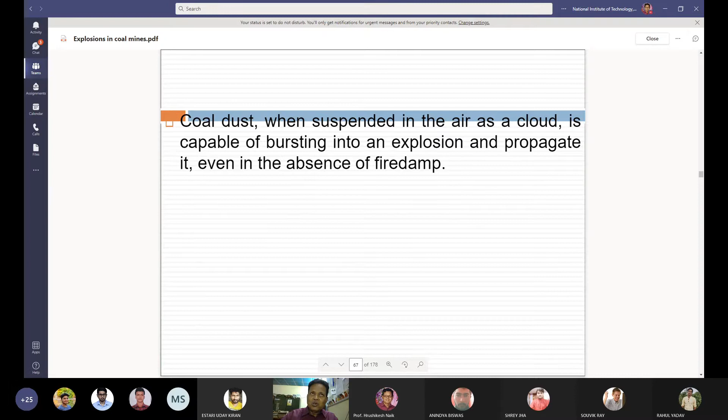So what is coal dust explosion? Coal dust, when suspended in the mine air as a cloud, is capable of bursting into an explosion and can propagate very fast even in the absence of fire damp. That is called a coal dust explosion.

For a coal dust explosion to take place, the following conditions should be present in the mines. First, the coal dust must be of a composition which includes sufficient volatile matter.

Second, the coal dust should be of necessary fineness for the explosion to take place, and it should be in a dispersible condition in the form of a thick cloud, so dense that one cannot see through it. The quantity amounts to 30 to 40 grams per cubic meter of the mining space.

Another condition is that a source of ignition of sufficient intensity should be present for the coal dust explosion to take place. If these conditions are fulfilled, the coal dust explosion is going to occur. Such circumstances generally exist after a fire damp explosion, and for this reason the coal dust explosion may take place.

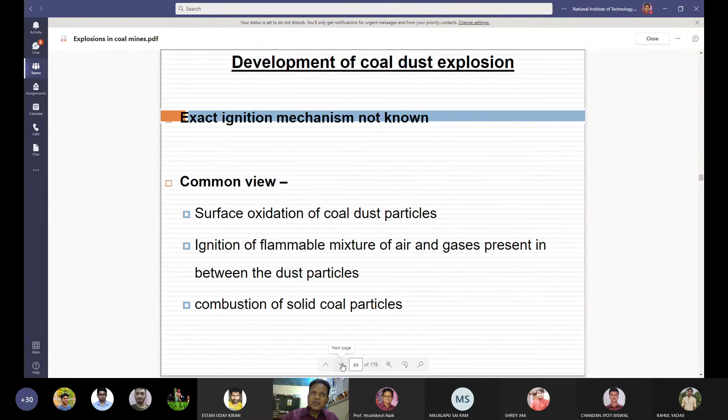This coal dust explosion develops in stages. The first stage of ignition is called 'puff'. It is a sudden combustion process of a part or whole of the airborne dust, marked by a very high temperature but without any dynamic effects.

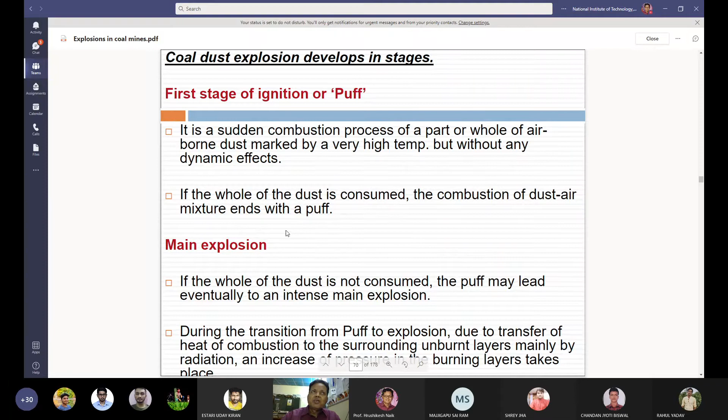It is a sudden combustion process of a part or whole of the airborne dust, marked by a very high temperature but without any dynamic effects. If the whole of the dust is consumed, the combustion of the dust-air mixture ends with a puff. But if the whole of the dust is not consumed, the puff may lead eventually to an intense main explosion.

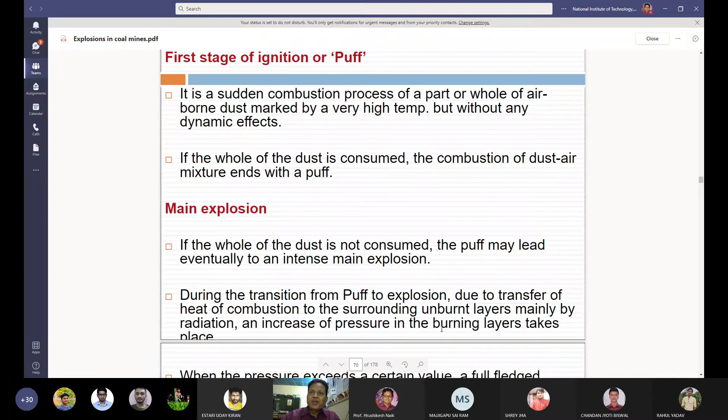During the transition from puff to explosion, due to transfer of heat of combustion to the surrounding unburnt layers, mainly by radiation, an increase of pressure in the burning layers takes place. When the pressure exceeds a certain value, a full-fledged explosion develops in which combustion takes place at a rapid rate. The pressure wave passes through the unburnt layers ahead of the explosion flame and stirs up the deposited dust, creating the necessary fuel in the form of a thick cloud for the following flame.

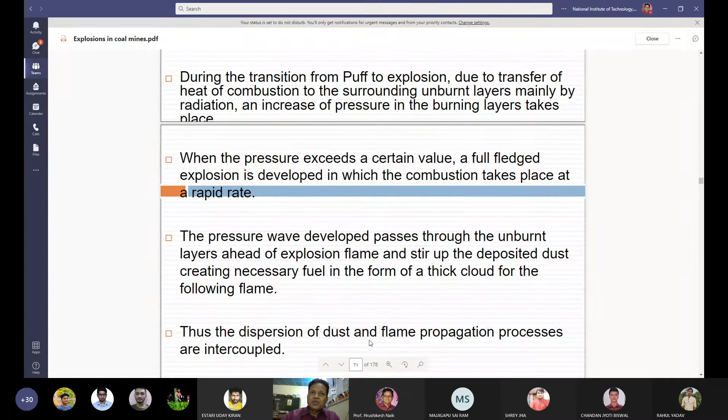Thus, the dispersion of dust and flame propagation processes are intercoupled.

Second, we are going to discuss flammability or explosive limit of coal dust. Just like methane gas explosion, flammability limits are there - lower flammable limit, upper flammable limit. Similarly, for coal dust, there are flammability or explosive limits. So what is flammability limit or explosive limit of coal dust? It is defined as its ability, when in the form of a cloud, to spread or propagate ignition to all points where dust-air mixtures of corresponding concentration are present.

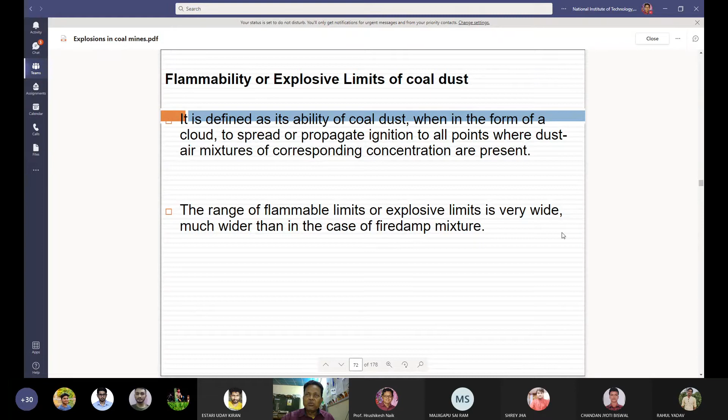The range of flammable limits or explosive limits is very wide, much wider than in the case of firedamp mixture. So the lower flammability limit is not an absolute quantity. It depends upon the particle size of the coal dust, chemical composition of the coal dust, nature and intensity of the igniting source, time of contact with the igniting source, turbulence of the coal dust cloud, uniformity of dust dispersion in the medium, purity of the sample, composition of the atmosphere, composition of the mine atmosphere, especially methane and oxygen contents in the mine atmosphere. These are the factors which influence the lower limit of flammability of coal dust.

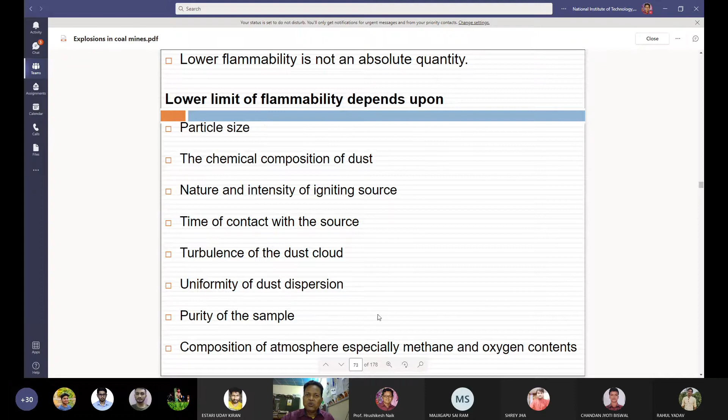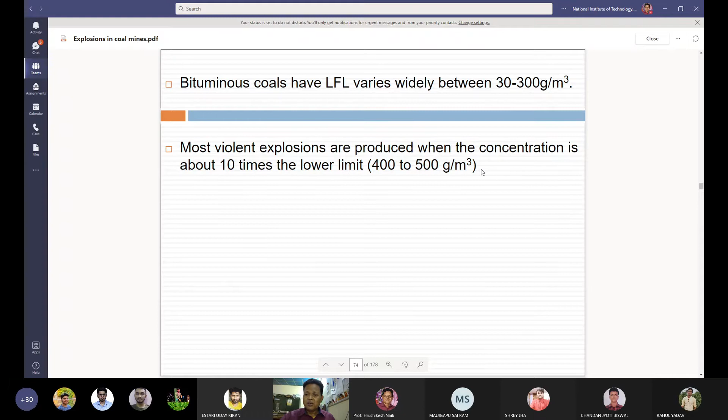Bituminous coals have a lower flammability limit which varies widely between 30 gram per cubic meter to 300 gram per cubic meter. Most violent explosions are produced when the concentration is about 10 times the lower limit, that is 400 to 500 gram per cubic meter.

Then, what is ignition of coal dust air mixture? Ignition of coal dust air mixture is not as rapid as with gas air mixture. A larger source of heat is required for the coal dust air mixture to explode.

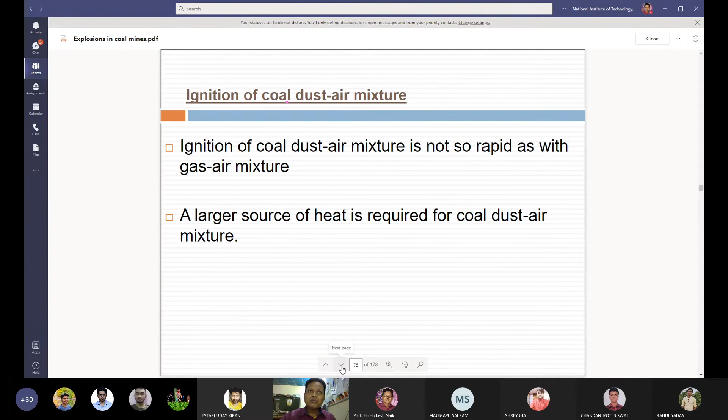The ignition temperature of coal dust cloud depends on the rank of the coal. The ignition temperature decreases as the rank of coal decreases from anthracite to subbituminous coal. So ignition temperature of coal dust depends upon the rank of the coal, and the nature and intensity of ignition source. It varies between 900 degrees centigrade and 600 degrees centigrade for relatively low ash coals.

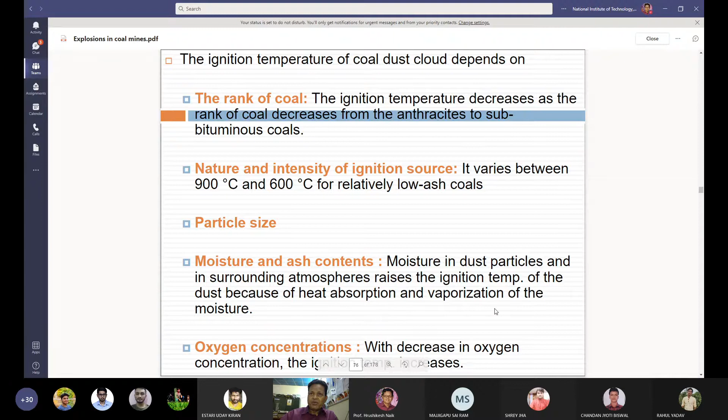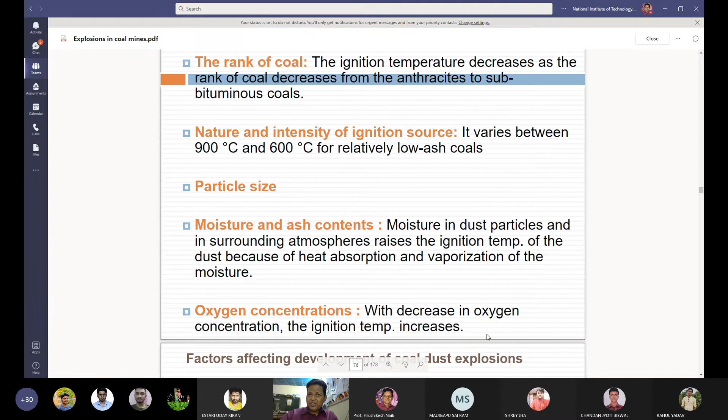Also, the ignition temperature depends on the particle size of the coal dust. It also depends on the moisture content and ash content. Moisture in dust particles and in the surrounding atmosphere raises the ignition temperature of the dust because of heat absorption and vaporization of the moisture. The ignition temperature of coal dust also depends on the oxygen concentration in the mine atmosphere - with a decrease in oxygen concentration, the ignition temperature increases.

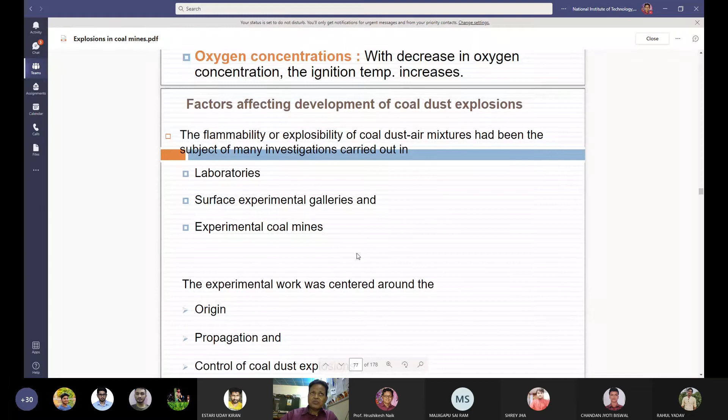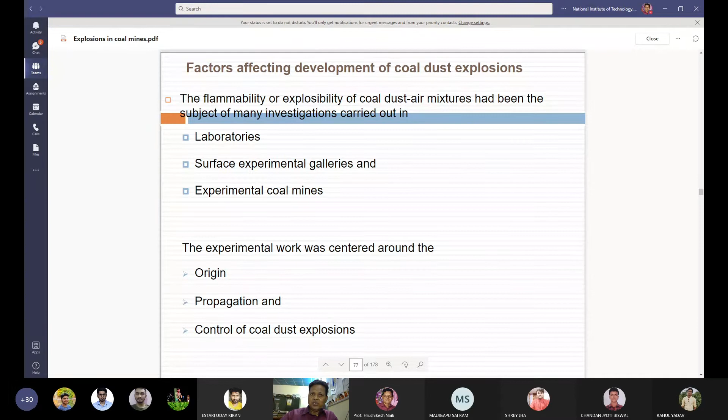Then there are certain factors which affect development of coal dust explosion. The flammability or explosibility of coal dust air mixtures had been the subject of many investigations carried out in the laboratories, surface experimental galleries, and experimental coal mines. The experimental work was centered around the origin, propagation, and control of coal dust explosion.

The following are the factors which affect the flammability or explosibility of coal dust air mixture: particle size of the coal dust, dustiness of mine workings, volatile matter content in the coal dust, percentage of ash in the coal dust, percentage of moisture in the coal dust, oxygen concentration in the mine atmosphere, nature and intensity of ignition source, presence of firedamp in the mine air, turbulence of the coal dust particles, and surrounding conditions.

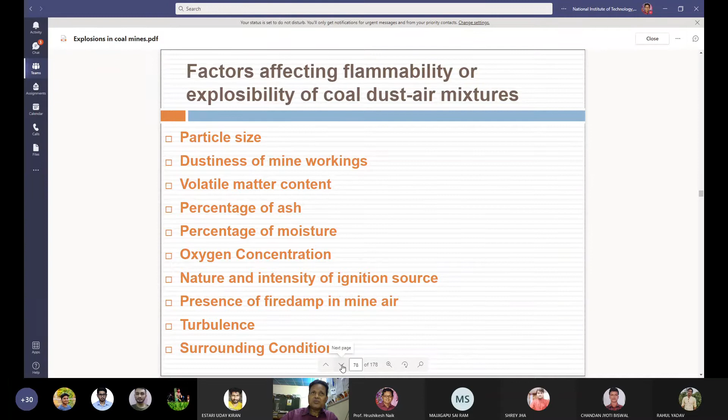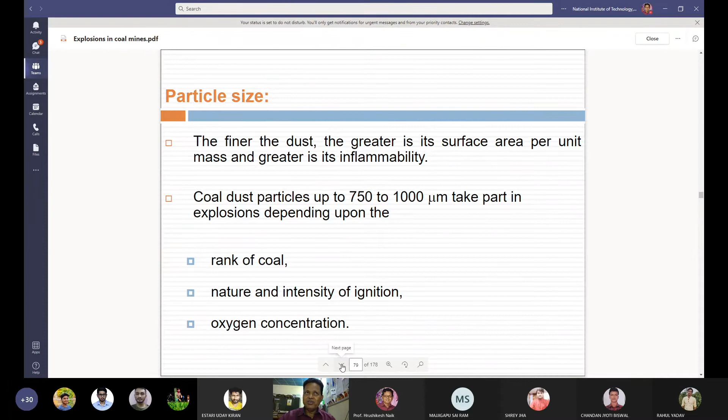What is particle size? The finer the dust particles, the greater is its surface area per unit mass, and the greater is its flammability. Coal dust particles up to 750 to 1000 micrometer take part in explosions depending upon the rank of the coal, nature and intensity of the ignition, and oxygen concentration of the mine atmosphere. The most dangerous particle size lies between 10 to 100 micrometer - if the coal dust particle size lies in this range, it is very dangerous.

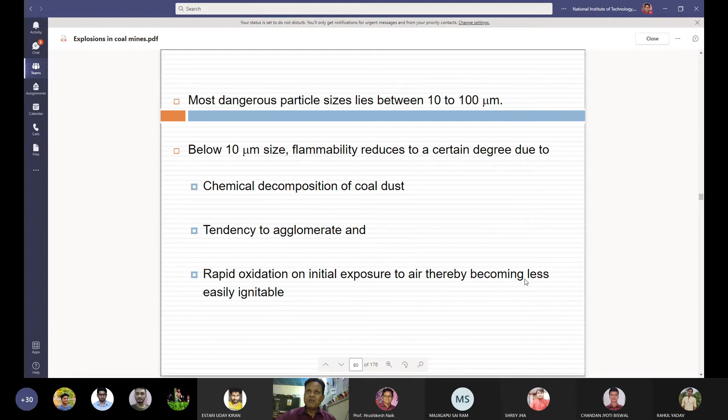Below 10 micron size, flammability of coal dust particles reduces to a certain degree due to chemical decomposition of the coal dust, tendency to agglomerate, and rapid oxidation on initial exposure to air, thereby becoming less easily ignitable. If the particle size lies between 10 micrometer to 100 micrometer, then it is very dangerous.

What do you mean by dustiness of mine workings? If the mine atmosphere is very dusty, it is called dustiness of mine workings. The dust cloud must be dense immediately surrounding the ignition source so that one cannot see through it. You cannot see anything if there is a cloudy dust there.

Minimum density of dust cloud which will propagate an explosion depends upon factors like the nature of the ignition source, fineness of the dust particles, and rank of the coal you are going to mine. A mine working is dangerously dusty if it contains 100 to 120 gram of dust per cubic meter of mine atmosphere, and most violent explosions occur at 300 to 400 gram per cubic meter.

The thermal ignitability curve for a coal dust, showing the relationship between ignition temperature and coal dust concentration, shows that the minimum value of the ignition temperature approaches asymptotically at higher dust concentrations.

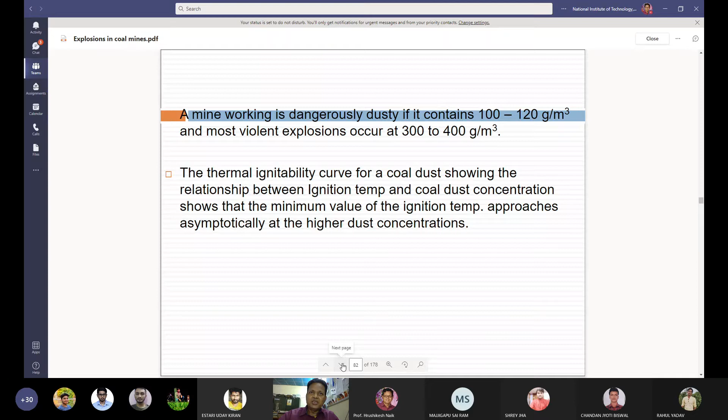How to calculate the volatile matter content in the coal dust? Flammability increases with increasing combustible volatile content. The volatile matter is usually calculated on a dry, ash-free basis by the formula: percentage of volatile matter in coal dust equals percentage of volatile matter from laboratory analysis into 100, divided by 100 minus percentage of ash minus percentage of moisture.

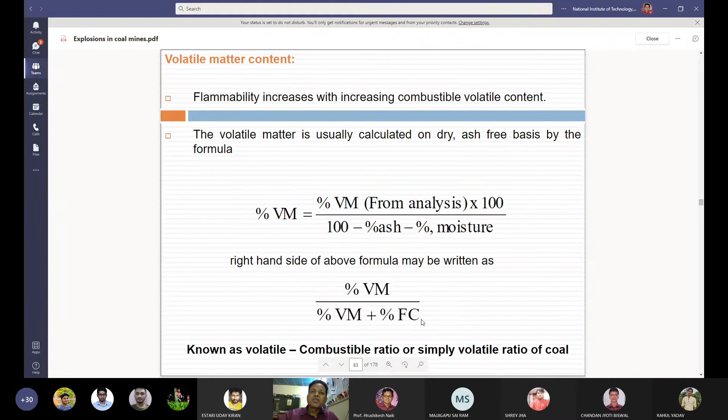The right hand side of the above formula may be written as percentage of volatile matter divided by percentage of volatile matter plus percentage of fixed carbon (FC), which is known as the volatile combustible ratio, or simply volatile ratio of coal. Volatile ratio of coal equals percentage of volatile matter divided by percentage of volatile matter plus percentage of fixed carbon in the coal dust.

Several investigations have shown that coal dust with volatile matter less than 10% is non-inflammable, not dangerous, and will not catch fire. If volatile matter lies between 10 to 14%, it is less inflammable. If volatile matter in the coal dust is more than 14%, it is highly inflammable - the coal dust particle is very, very highly inflammable.

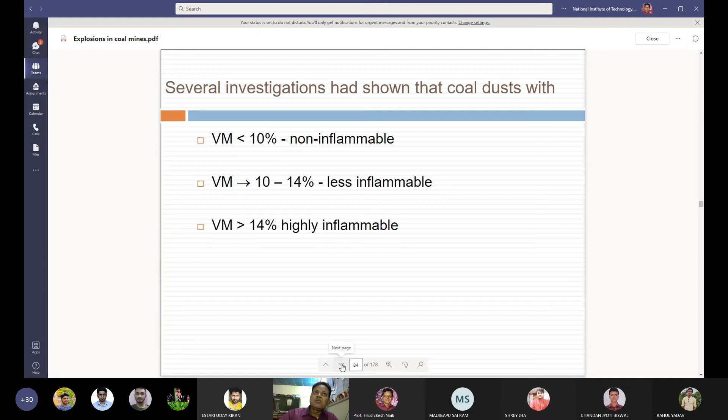What do you mean by percentage of ash in coal particles? Increase in ash content or presence of inert foreign material reduces the ignitability or flammability of coal dust because of heat absorption. If percentage of ash is more, the ignitability and flammability of coal dust will reduce. Stone dusting in coal mines functions on this principle, which is a practical application of the use of inert dust to prevent an explosion from taking place.

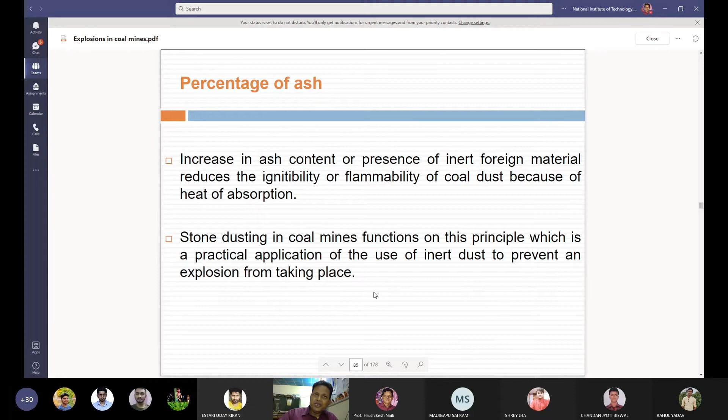Percentage of moisture in coal dust: moisture in dust particles raises the ignition temperature of the dust particles. It exerts a cooling effect because heat is absorbed during heating and vaporization, thereby reducing the energy available for ignition of the coal dust cloud. Coal dust containing 25 to 30% moisture content tends to wet and agglomerate the fine particles and reduces their dispersibility. If the coal dust is not dispersible, it is less liable to explosion.

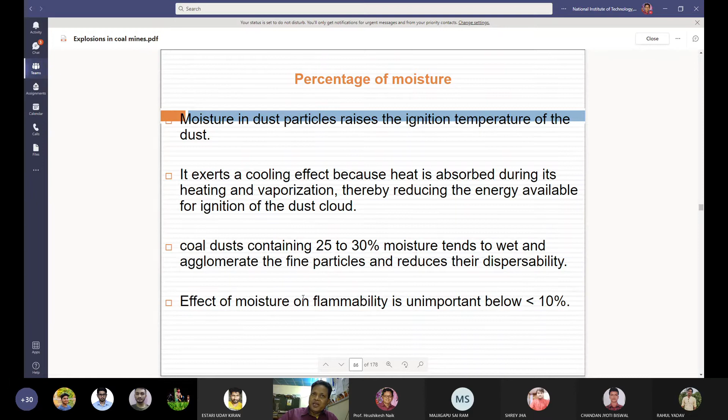Effect of moisture on flammability is unimportant below 10% - if moisture content is less than 10%, it is not going to affect the flammability of the coal dust particles. Then, oxygen concentration in the mine atmosphere: variation in oxygen concentration affects the ease of ignition of dust clouds and the explosion pressure.

With decrease in oxygen concentration, the ignition energy required increases, ignition temperature increases, and maximum explosion pressure decreases. This is the oxygen concentration in the mine atmosphere which influences the coal dust explosion. Variation in oxygen concentration affects the ease of ignition of coal dust clouds and the explosion pressure. With decrease in oxygen concentration, the ignition energy required increases, ignition temperature increases, and maximum explosion pressure decreases.

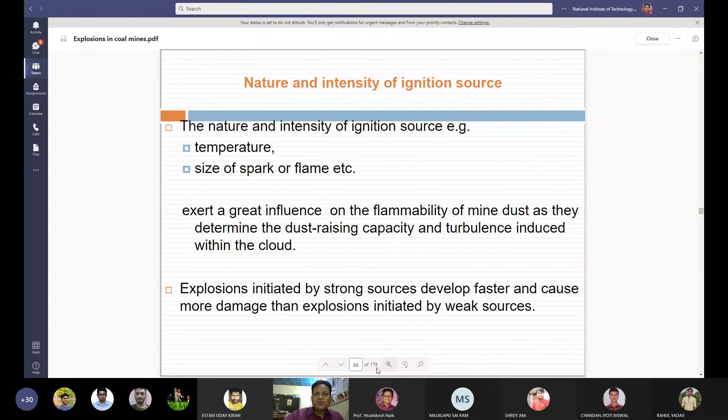Another factor is the nature and intensity of the source of ignition. The nature and intensity of the ignition source, that is temperature, size of spark or flame, is a very important factor for the coal dust explosion to take place. It exerts a great influence on the flammability of mine dust, as they determine the dust raising capacity and turbulence induced within the cloud. Explosions initiated by strong sources develop faster and cause more damage than explosions initiated by weak sources. This is the nature and intensity of ignition source.

Then presence of fire damp in the mine air. If fire damp is present, the flammability of coal dust increases almost directly in proportion to the percentage of fire damp in the mine atmosphere. Presence of fire damp in mine air in percentage less than its lower limit reduces the lower explosive limit of the coal dust. 1% methane by volume in 1 cubic meter of air is equivalent to about 12 gram of coal dust.

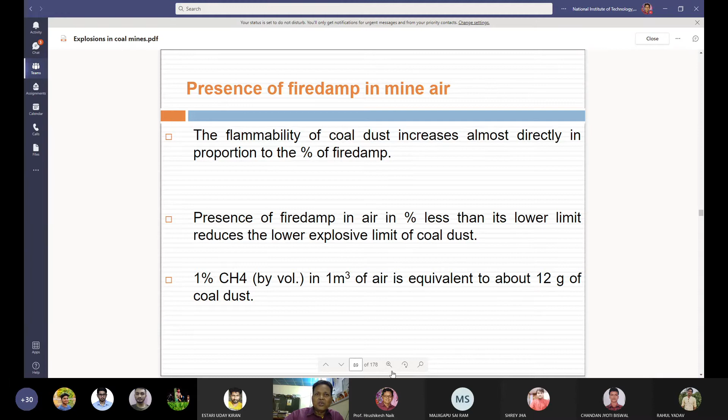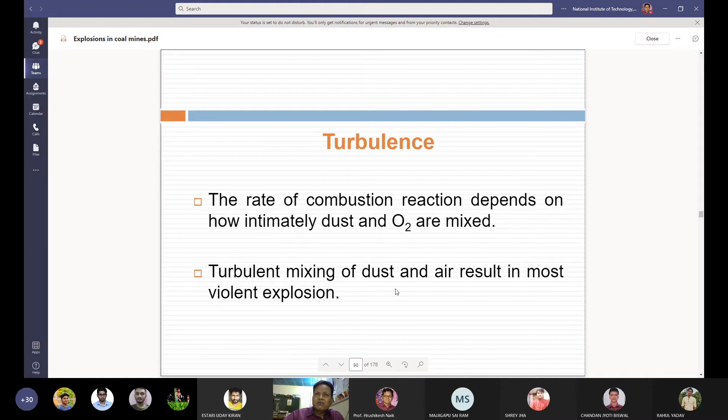Then what do you mean by turbulence? Movement. This is also having a bearing on the coal dust explosion. The rate of combustion reaction depends on how intimately dust and oxygen are mixed. Turbulent mixing of dust and air results in most violent explosion.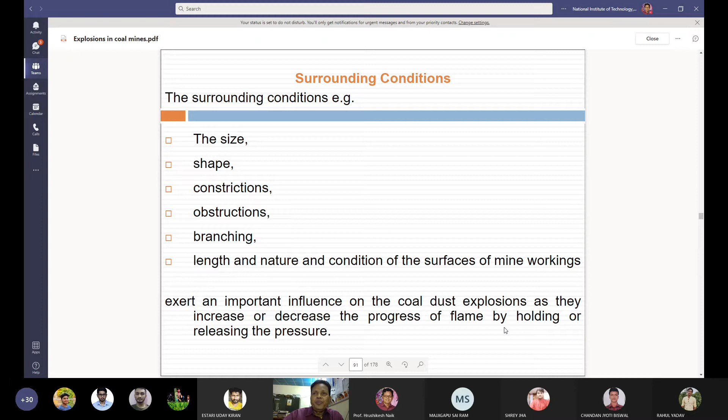Then another condition is the surrounding condition: the size of the mine gallery, shape of the mine gallery, constrictions, obstructions, branching, length and nature and condition of the surfaces of mine workings. These also exert an important influence on the coal dust explosions, as they increase or decrease the progress of the flame by holding or releasing the pressure.

Next we are going to discuss the causes of coal dust explosions in coal mines. What are the various causes? For a coal dust explosion to take place in coal mines, two conditions must be fulfilled. First, the dust must be present as a dense cloud. Second, a source of ignition should be there in the form of a flame. Then only the coal dust is going to explode.

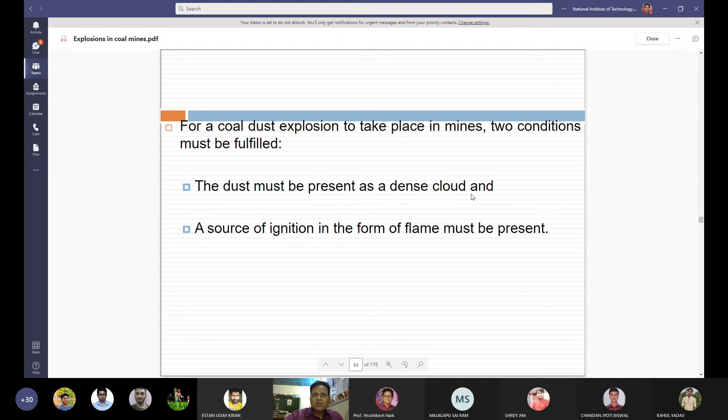For the coal dust explosion to take place, there are two conditions necessary. One is the dust must be present as a dense cloud, and second, a source of ignition should be there in the form of a flame to ignite the coal dust particles. The various causes of direct ignition of a coal dust cloud can be classified: if you are having a naked flame, it will ignite the coal dust particles.

If there is friction between metal and metal, friction between metal and rock, friction between rock and rock, then also fire will be generated and the coal dust particles will catch fire. If there is an electrical spark, that spark also ignites the coal dust cloud. If there is a fire damp explosion in the mines, that will also ignite the coal dust particles. So these are the various causes of direct ignition of a coal dust cloud, which can be classified as naked flames, friction, electrical sparks, fire damp explosions.

What is a naked flame? It is the easiest means of igniting a dust cloud, as the source of heat is of considerable size and a large part of the dust can be heated by the help of a naked flame.

Friction. Second one is friction. Hot surfaces as a result of mechanical friction, such as overheated bearings, may ignite surrounding explosive dusty atmosphere.

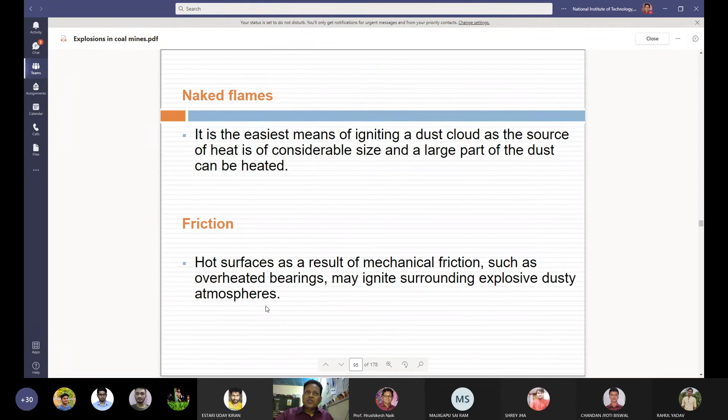Third is electrical sparks. Electrical sparks from short circuiting and arcing, electrical arcing at electrical equipment or overheated trolley wire may ignite an explosive dust air mixture. Static electric sparks can also ignite explosive dust air mixtures. Fine particles of dust may readily become electrified by friction with air or ducting through which they pass. Under suitable conditions, a discharge or sudden recombination of separated positive and negative charges can occur, which can act as a source of ignition.

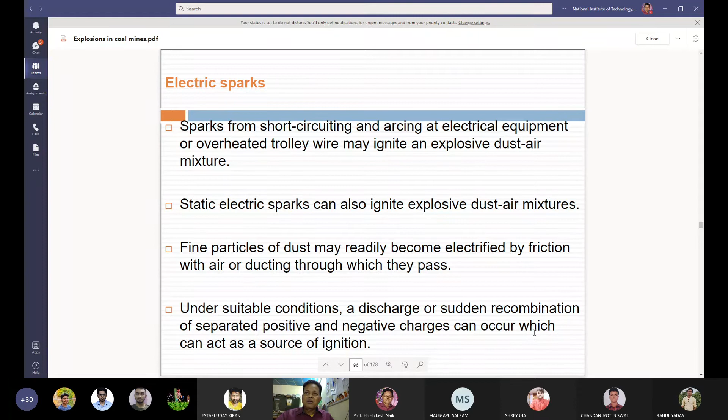Then, if there is a fire damp explosion in the mines, it is the commonest source of initiation of a coal dust explosion.

If there is a fire damp explosion, it is very easy to ignite coal dust particles, and coal dust explosion is going to take place because of the fire damp explosion. Besides posing the danger of direct ignition, a fire damp explosion may raise deposited dust from the mine floor, sides, or roof into mine air very quickly before its flame has ceased, and then propagate as a coal dust explosion. A very small gas explosion initiated by accidental ignition of a small quantity of fire damp mixture may thus bring about a much bigger coal dust explosion.

It is significant that most fire damp explosions do not develop into coal dust explosions due to their failure to raise a sufficiently dense dust cloud.

How to prevent and suppress coal dust explosion? How to prevent coal dust explosion? How to suppress coal dust explosion? It is much easier to prevent a coal dust explosion being initiated than to arrest one.

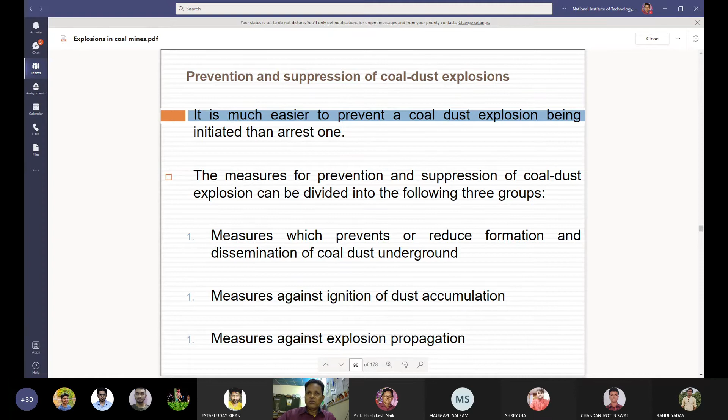So the first measure: what measures should you take which prevent or reduce the formation and dissemination of coal dust in underground coal mines? Elimination of coal dust in mines is the logical means of eliminating coal dust explosion hazard. You have to reduce the coal dust in the mine atmosphere. The following important measures should be adopted to reduce the formation, distribution, and accumulation of dust particles in mine workings.

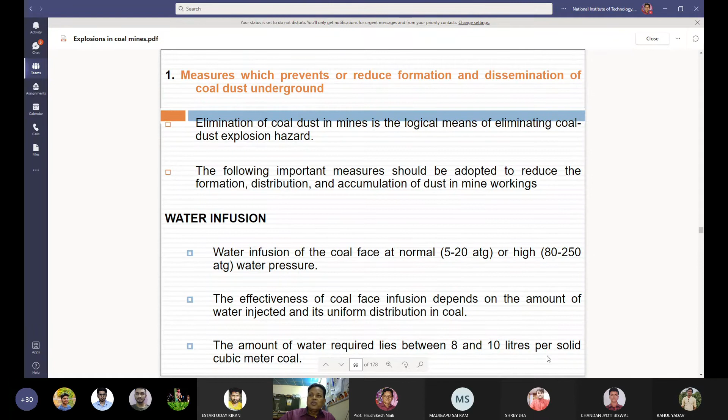First, by water infusion. Water infusion of the coal face at normal or high water pressure. The effectiveness of coal face infusion depends on the amount of water injected and its uniform distribution in the coal face. The amount of water required lies between 8 and 10 liters per solid cubic meter of coal.

So for that purpose, you have to go for wet mining of coal using wet pneumatic picks with machine cutting, using sharp picks of suitable type, selecting optimal cutting and traveling speeds of the machine, using wet cutting so that dust will not go into the atmosphere.

Then during blasting in coal mines, use of stemming cartridges of calcium chloride powder containing 82 to 85% calcium chloride and 15 to 18% water will reduce dust production in your mines.

With power loading, using a conventional shearer loader, by using sharp picks of suitable type and pick lacing, selecting suitable drum design, optimal rotational speed of the drum, traveling speed of the machine, and proper direction of drum rotation.

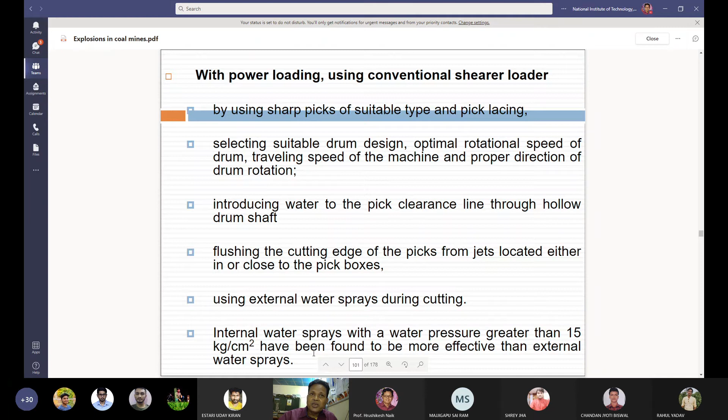Introducing water to the pick clearance line through the hollow drum shaft, flushing the cutting edge of the picks from jets located either in or close to the pick boxes, using external water sprays during cutting. Internal water sprays with a water pressure greater than 15 kg per square centimeter have been found to be more effective than external water sprays.

Wetting through the coal pile before it is manually or mechanically loaded, using proper type of conveyors with which dust production is minimum, covering the total length of the conveyor with a hood, water spraying at transfer points and loading points and improving their design. These are the measures you can take to reduce the dust concentration in your mine atmosphere.

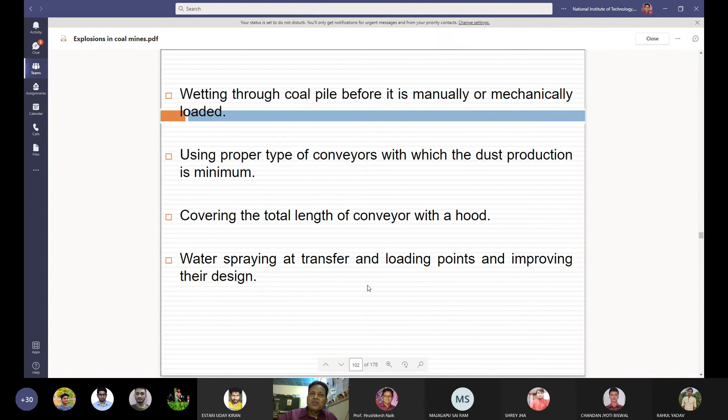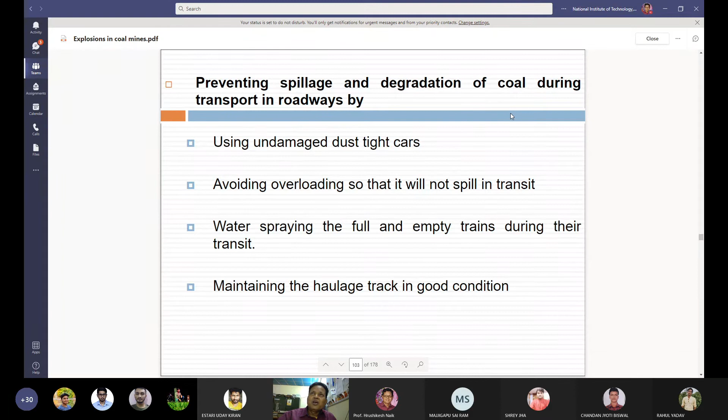Second, prevention you have to take: preventing spillage of coal dust, spillage of material and degradation of coal during transport in roadways by using undamaged dust-tight cars, avoiding overloading so that it will not spill in transit while traveling, water spraying the full and empty trains during their transport, and maintaining the haul track in good condition. These are the preventive measures you can take so that there will be no spillage of material and degradation of coal during transport in roadways.

On coal conveyor roadways, reduce spillage by selecting suitable capacity conveyor as well as proper belt width and speed, providing adequate bunker capacity at loading points and centralizing the flow of coal, proper ventilation, restricting velocity of air current in mine airways to less than 3 meters per second, and adopting a homotropal ventilation system.

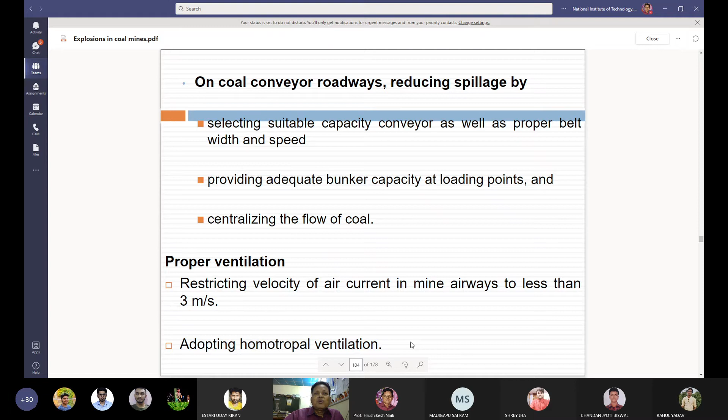Third measure you have to take to prevent coal dust accumulation in your mines: preventing dust accumulation in mine workings by dry suction at loading and unloading points at which large quantities of dust are produced and cannot be suppressed in the ordinary way.

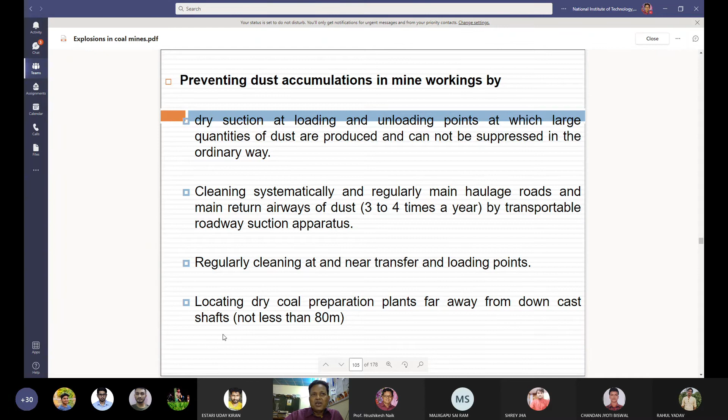Cleaning systematically and regularly main haulage roads and main return airways of the dust by transportable roadway suction apparatus. Regularly cleaning at and near the transfer and loading points, and locating dry coal preparation plants far away from downcast shafts, not less than 80 meters.

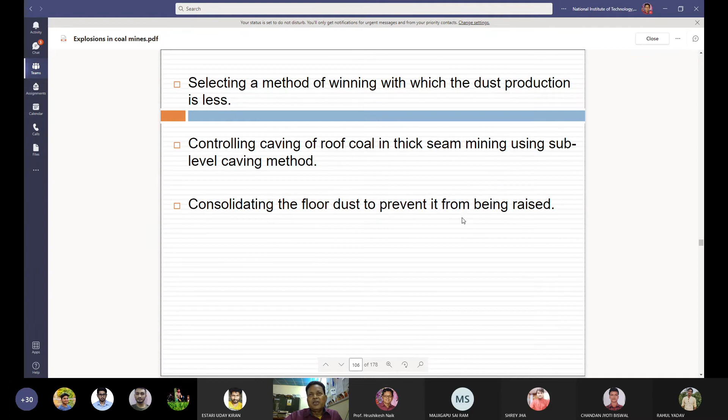Selecting a method of winning with which dust production would be less. Controlling caving of the roof coal in thick coal seams by mining using the sub-level caving method. Consolidating the floor dust to prevent it from being raised.

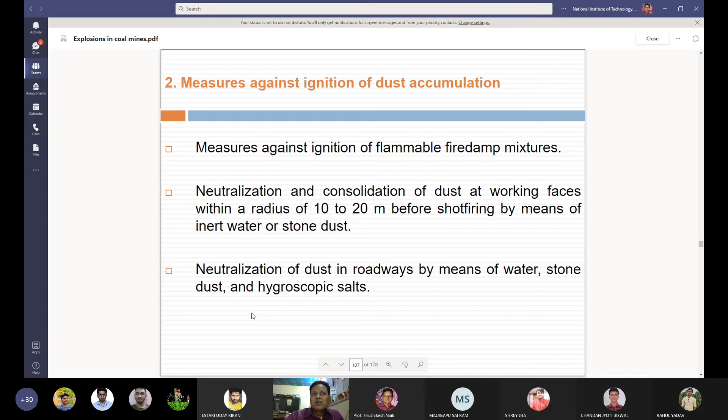Second, measures against ignition of dust accumulation. What measures do you have to take against ignition of coal dust accumulation? Measures against ignition of flammable fire damp mixtures include neutralization and consolidation of the dust at working faces within a radius of 10 to 20 meters before shot firing, by means of inert water or stone dust, and neutralization of dust in roadways by means of water, stone dust, and hygroscopic salts.

Third measure, measures against explosion propagation. You should not allow the explosion to propagate from one place to another. What measures do you have to take to prevent explosion propagation? The protective measures which have been found in practice to have varying degrees of effectiveness in arresting explosion propagation are generalized wetting of the coal dust particles, generalized stone dusting, stone dust barriers, explosion stoppings, salt zones, water barriers, and triggered barriers.

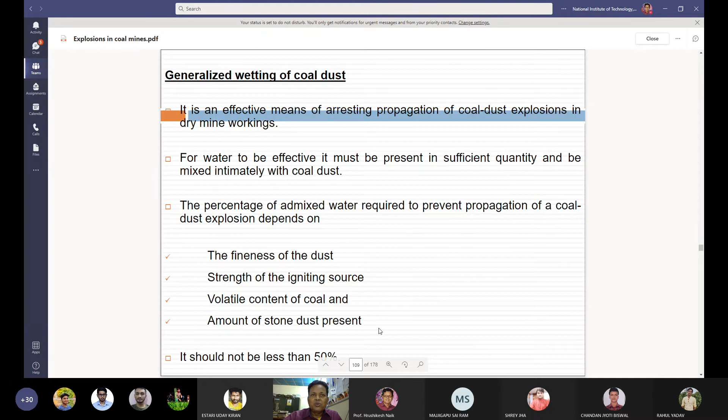Generalized wetting of coal dust, how is it done? It is an effective means of arresting propagation of coal dust explosions in dry mine workings. For water to be effective, it must be present in sufficient quantity and be mixed intimately with coal dust. The percentage of admixed water required to prevent propagation of a coal dust explosion depends upon the fineness of the coal dust particles, strength of the igniting source, volatile content of the coal, and amount of stone dust present. It should not be less than 50%.

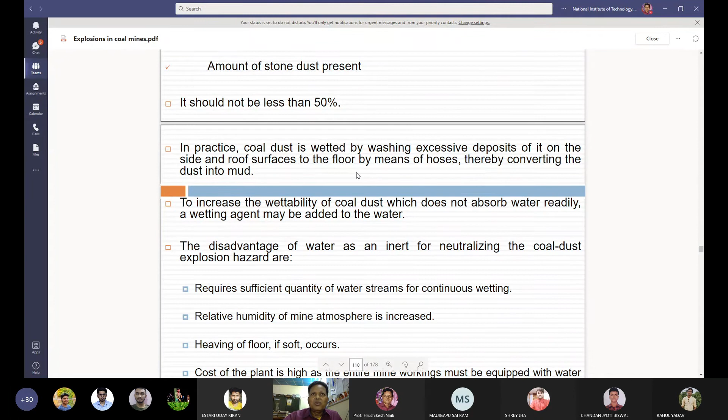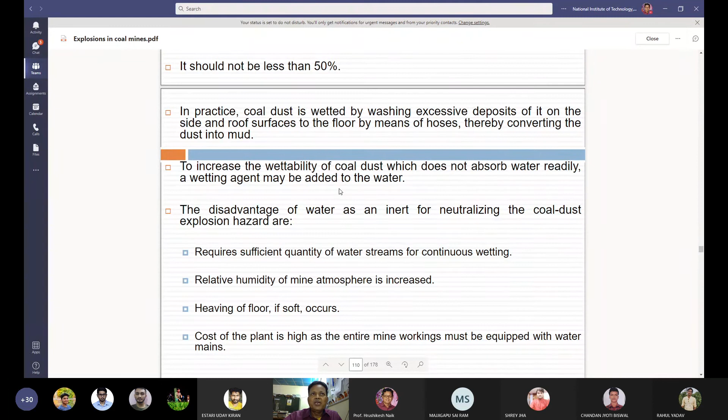In practice, coal dust is wetted by washing excessive deposits of it on the side and roof surfaces down to the floor by means of water hoses, thereby converting the dust into mud. To increase the wettability of coal dust, which does not absorb water readily, a wetting agent may be added to the water.

The disadvantages of water as an inert material for neutralizing the coal dust explosion hazard are: it requires a sufficient quantity of water streams for continuous wetting; relative humidity of the mine atmosphere is increased; heaving of the floor occurs if soft material is present; and the cost of the plant is high, as the entire mine workings must be equipped with water mains.

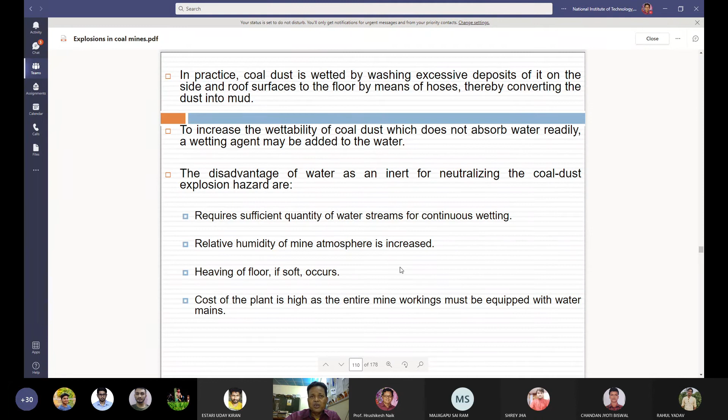So, generalized stone dusting. You know that stone dust is an inert material, so stone dusting is done to quench the coal dust explosion.

It consists of applying stone dust on the sides of the gallery, on the roof of the gallery, on the floor of the gallery, and on all mine workings except those within 10 meters or less of all working faces, so that it overlays the deposited coal dust and thus prevents the latter from being ignited or taking part in an explosion.

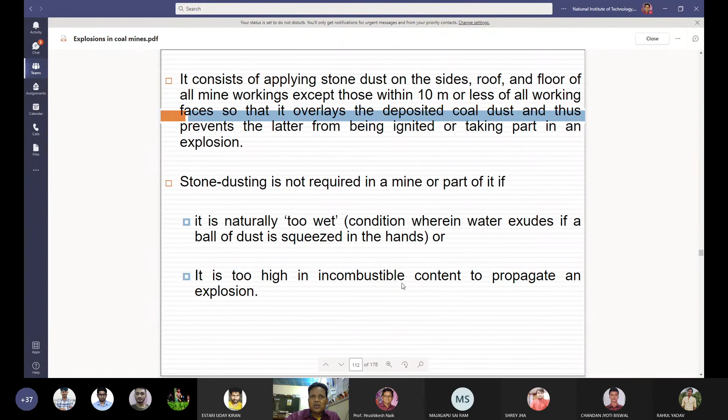Stone dust is not required in a mine or part of it if it is naturally too wet, such that water exudes when a ball of dust is squeezed in the hands, or if it is too high in incombustible content to propagate an explosion.

In 1891, British engineer W. Garforth first observed that an explosion did not propagate to a part of a mine which was well stone dusted. With this observation, stone dusting began in Britain and was officially adopted in 1920. Stone dusting was officially adopted in France in 1911 and in Germany in 1926. Today, generalized stone dusting is done in mines of almost all coal mining countries of the world.

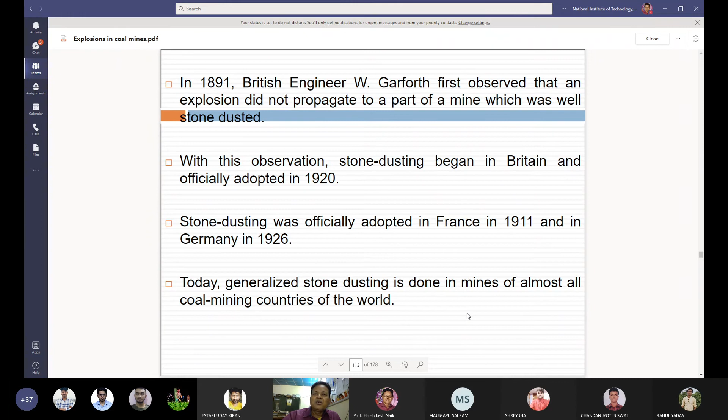The value of stone dust application is due to the following facts. When coal dust is mixed with enough incombustible dust, it will not explode or assist in propagation of an explosion.

When incombustible dust is raised into an explosion flame in a sufficiently dense cloud, it gets heated up, taking away heat from the flame. Greater the amount of stone dust in the flame, greater is the cooling effect. The incombustible dust also serves to shield or blanket the coal dust particles from heat of radiation so that they do not take part in combustion anymore.

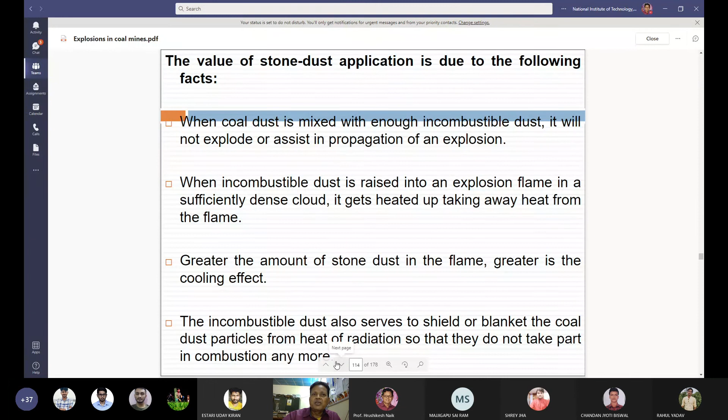As coal dust is constantly produced as a result of coal mining operations and gets deposited by ventilating currents in mine workings, one application of stone dust will not be sufficient to keep the mine workings immune from explosions. Stone dusting must be applied at regular intervals of time after it has been first applied.

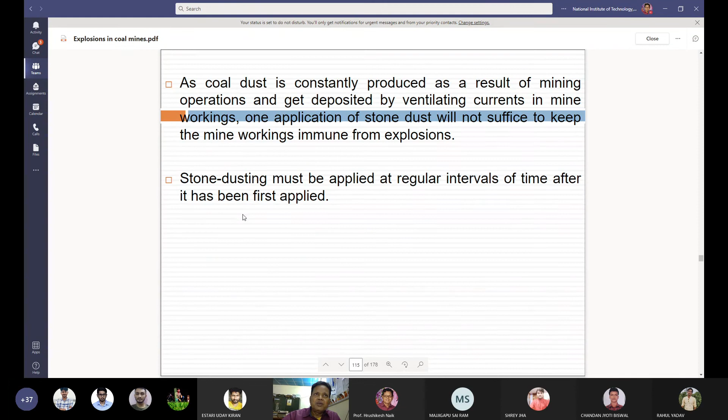The minimum incombustible content by mass required by the coal dust depends on characteristics of the coal particle, especially its volatile matter content, fineness of the coal dust particles, percentage of methane present in the mine atmosphere, and requirement of minimum incombustible matter in the coal dust.

In India, it is 70%. In FRG, it is 80%. In USA, it is 65%. So for a given coal mine, the quantity of stone dust to be applied in mine workings can be calculated from the following relation.

About 3 to 7 kg stone dust per ton of coal output is required in the coal mines. So this is the formula you can use for calculating the quantity of stone dust required to be applied in mine workings for neutralizing the coal dust explosion.

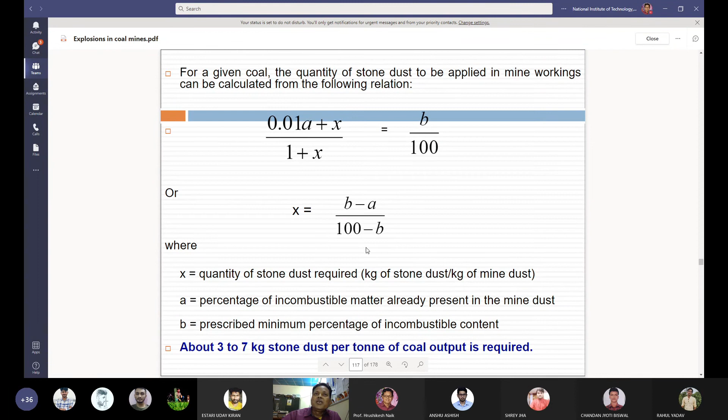Characteristics of suitable stone dust. What characteristics should the stone dust have? The stone dust should be fine. It should not be hygroscopic so that it does not cake. It should have good dispersibility - stone dust should be readily dispersible into the mine atmosphere when blown by mouth or by suitable appliances.

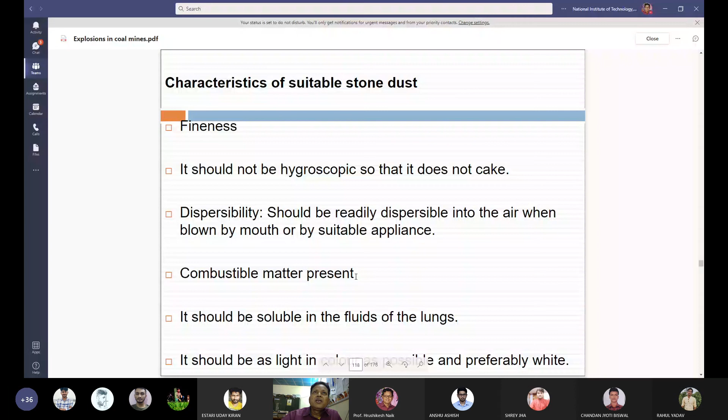Combustible matter should not be present in the stone dust. It should be soluble in the fluids of the lungs. It should be as light in color as possible, and preferably white color is required.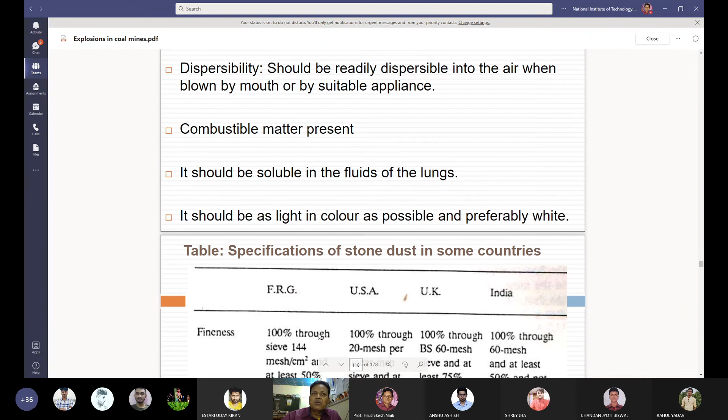So this is the specification of stone dust in some countries. In Germany, FRG, fineness is 100% through sieve of 144 mesh per centimeter square, and at least 50% through sieve of 6400 mesh per centimeter square by mass.

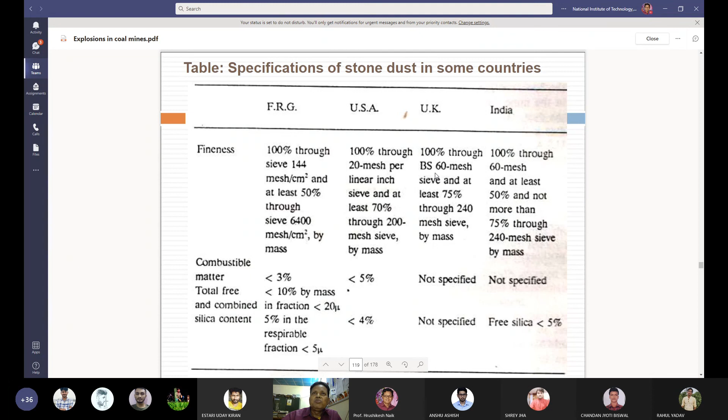In USA, 100% through 20 mesh per linear inch sieve and at least 70% through 200 mesh sieve by mass. In United Kingdom, 100% through BS60 mesh sieve and at least 75% through 240 mesh sieve by mass.

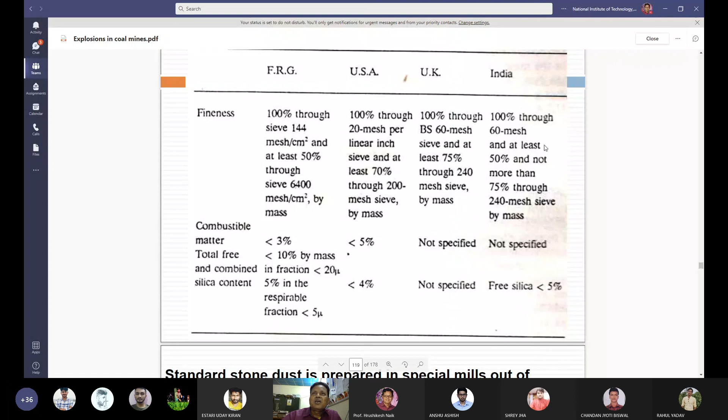In India, 100% through 60 mesh and at least 50% and not more than 75% through 240 mesh sieve by mass. Combustible matter should be less than 3%, less than 5%, not specified, and not specified respectively for these countries.

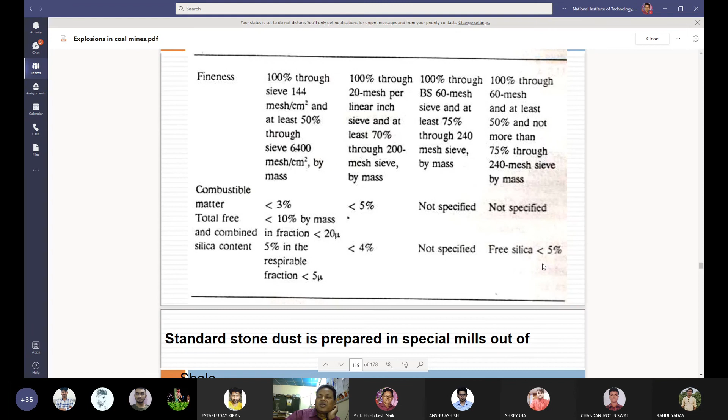Total free and combined silica content should be less than 10% by mass in the fraction less than 20 micron, and less than 5% in the respirable fraction less than 5 micron; less than 4%, not specified, free silica less than 5%. So this is the specification.

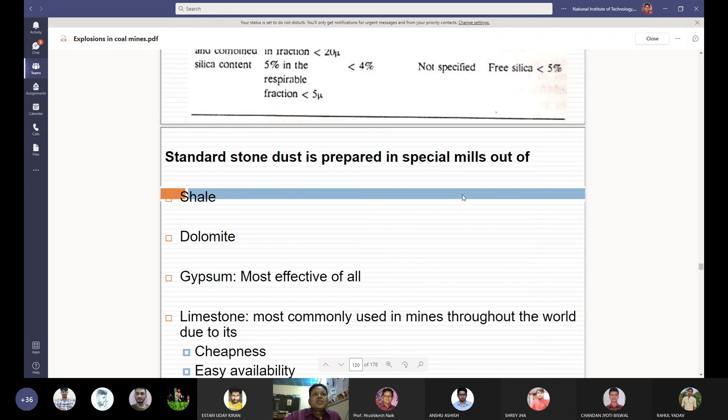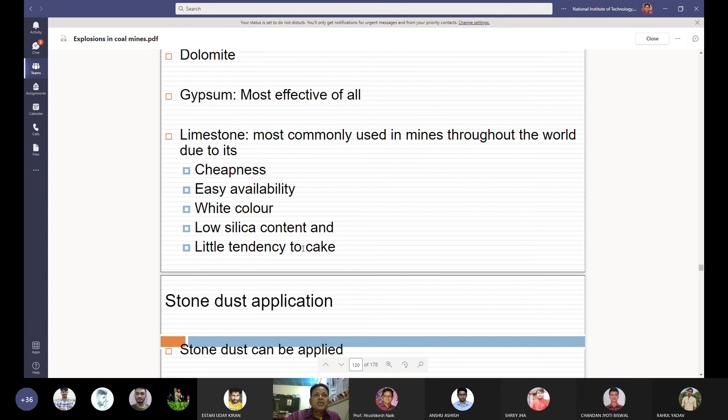Standard stone dust is prepared in special mills out of shale, dolomite, gypsum - most effective of all - and limestone, most commonly used in mines throughout the world due to its cheapness, easy availability, white color, low silica content, and little tendency to cake. This stone dust application can be applied by hand or by mechanical means using stone dusting machines in the mines.

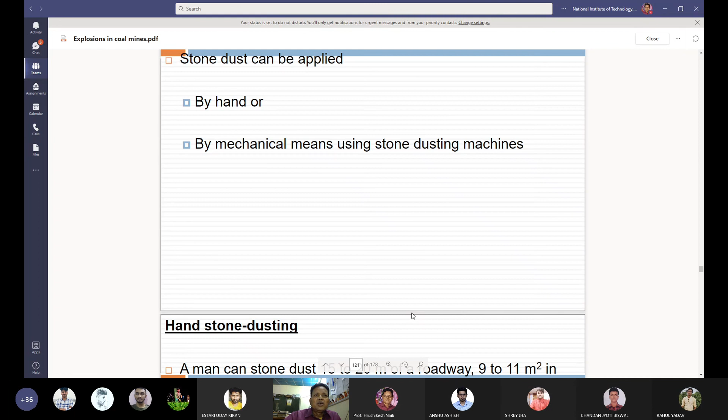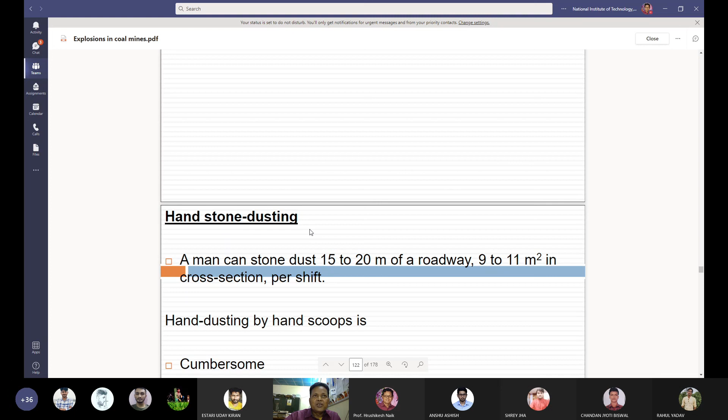In the next class, we are going to discuss hand stone dusting in coal mines and applying mechanical means. So what is hand stone dusting? A man can stone dust 15 to 20 meters of a roadway, 9 to 11 meters square in cross section, per shift of working.

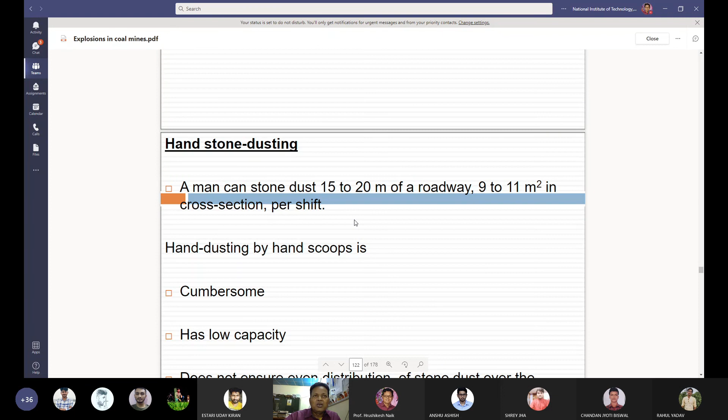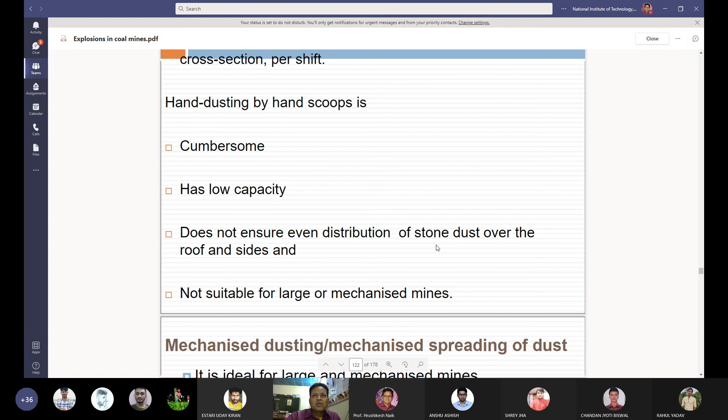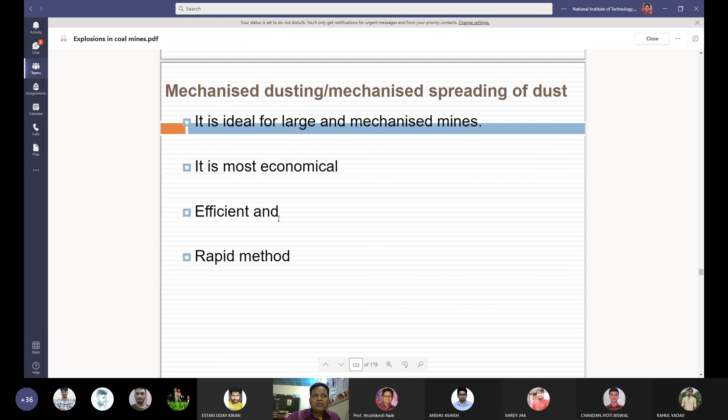Hand dusting by hand scoops is a cumbersome process, has low capacity, does not ensure even distribution of dust over the roof and sides of the mine, and is not suitable for large or mechanized coal mines. Therefore, you have to go for mechanized dusting, mechanized spreading of the dust. It is ideal for large and mechanized mines. It is most economical, very efficient, and a very rapid method of stone dusting.

So stone dusting machines and stone dust distribution we'll discuss in the next class.